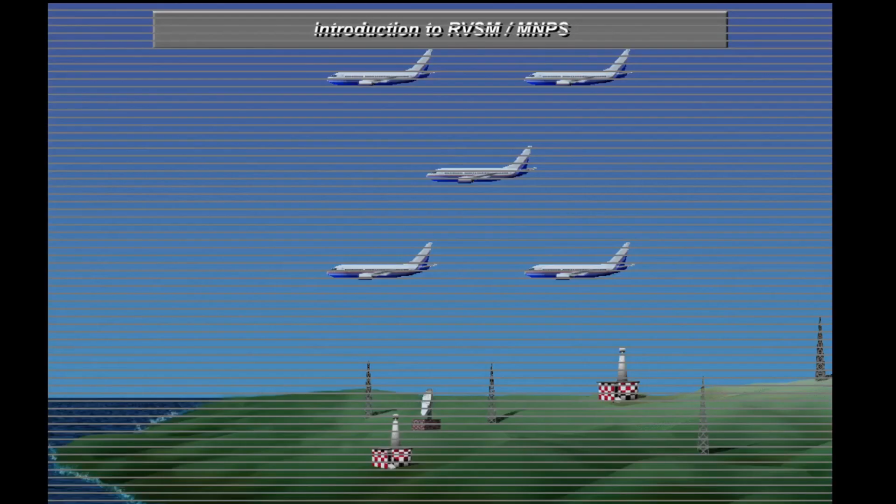Navigation aids on the ground enable aircraft to pinpoint their position with high accuracy.

Most oceanic airspace lacks radar coverage and radio navigation aids, so aircraft must rely on their own long-range navigation systems. To ensure safety, air traffic control requires higher separation standards in oceanic airspace. Improvements in technology and redundancy now allow approved aircraft to fly with reduced vertical and horizontal separation in certain airspace. MNPS airspace allows reduced lateral separation requirements, while RVSM airspace allows reduced vertical separation requirements.

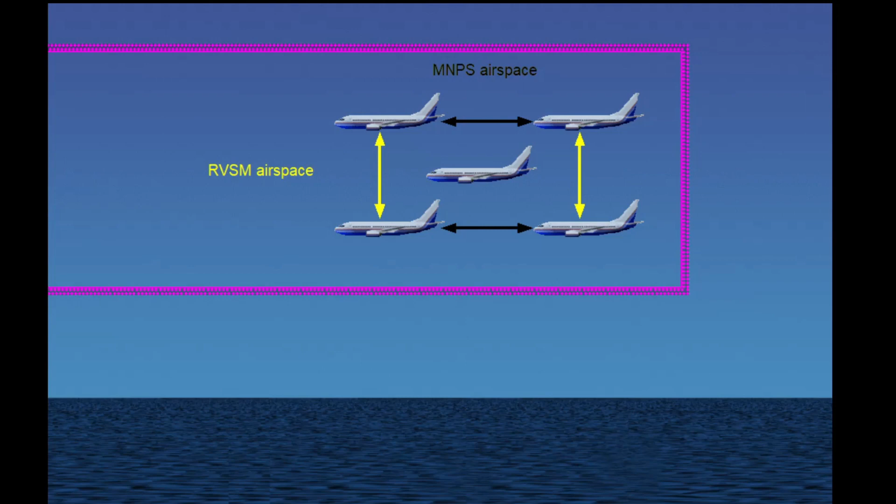Let's take a closer look at MNPS, which stands for Minimum Navigation Performance Specification. MNPS airspace has been implemented in the North Atlantic region within these oceanic control areas from flight level 285 to flight level 420.

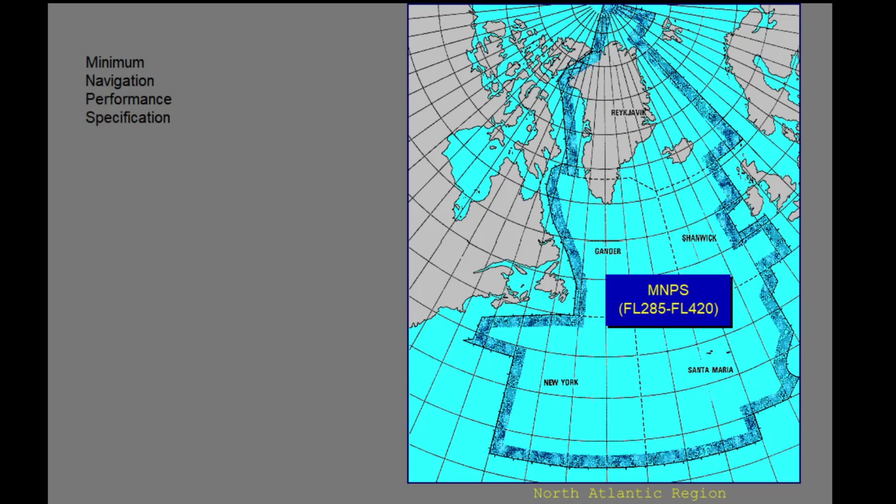Organized tracks in the North Atlantic were once spaced 120 nautical miles apart. With the implementation of MNPS, the track spacing has been reduced to 60 nautical miles. This saves fuel and minimizes traffic delays by accommodating greater numbers of aircraft in the most fuel-efficient routes available. Aircraft within this airspace must be able to fix their position with a higher degree of accuracy.

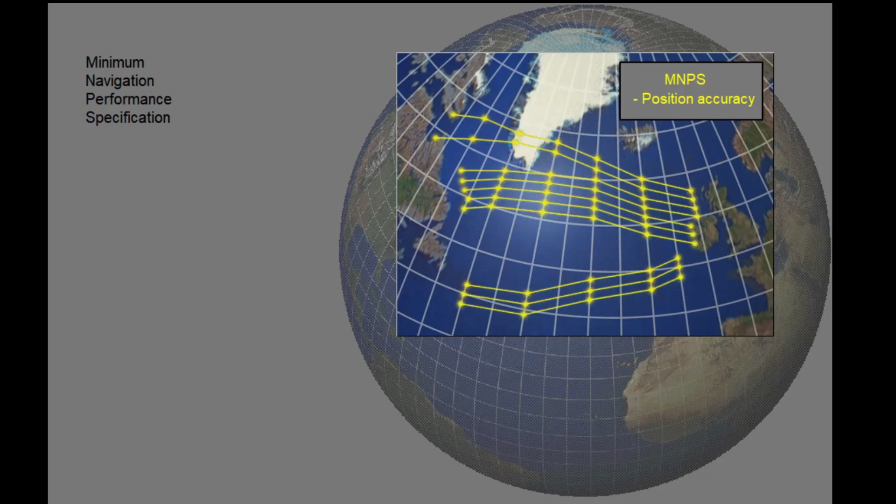The North Pacific region has fixed tracks spaced 50 nautical miles apart. Within the North Pacific route system, the primary form of lateral separation is based on RNP-10. RNP-10 airspace makes a requirement for accurate position keeping, but it is not considered MNPS airspace.

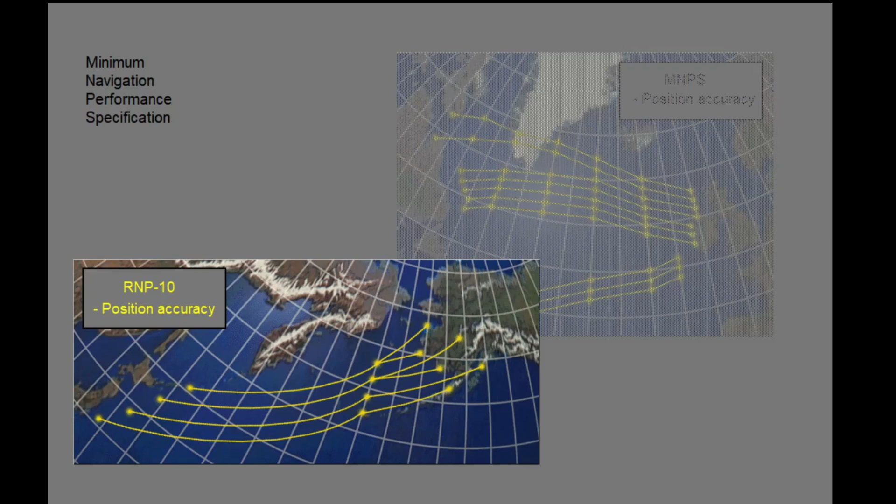MNPS airspace specifies both the position accuracy for the aircraft and sets additional requirements for the carriage of specific navigation equipment. We'll discuss these requirements later in the lesson.

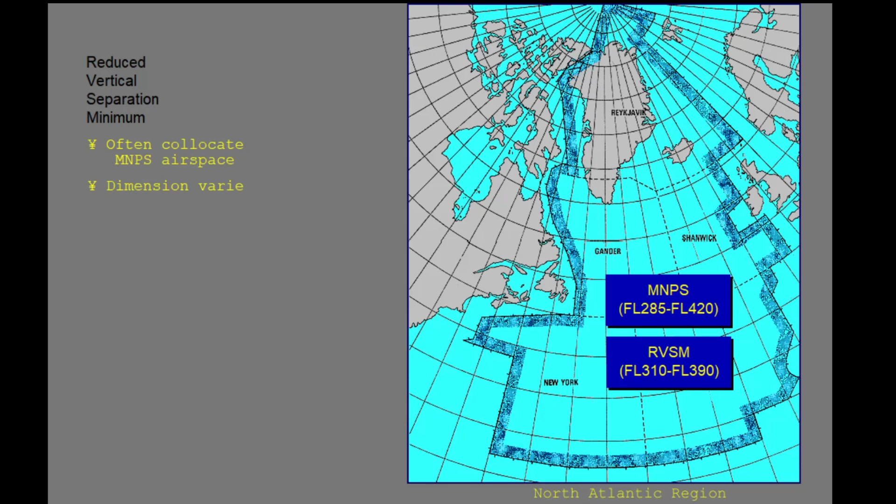Now, let's take a closer look at RVSM, or Reduced Vertical Separation Minimum. Generally, RVSM airspace in the North Atlantic is co-located with MNPS airspace. The dimensions of this airspace varies. In the North Atlantic, RVSM airspace is between flight level 310 and flight level 390. In the North Pacific, RVSM airspace is between flight level 290 and flight level 410.

RVSM transition areas indicate where ATC will transition aircraft from 2,000 feet separation to 1,000 feet separation. This transition occurs under radar contact in specified transition areas.

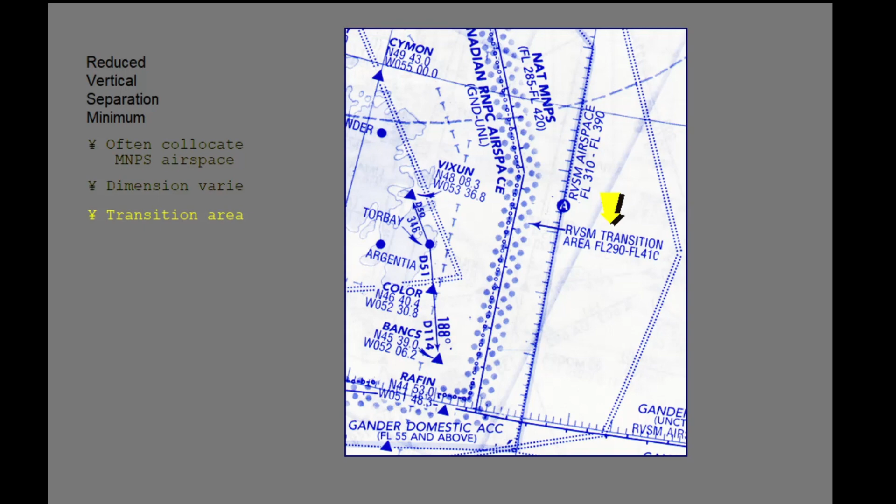In the United States, above flight level 290, the conventional vertical separation minimum is 2,000 feet. As of January 20, 2005, domestic RVSM was implemented. This allows for 1,000 feet of separation. RVSM saves fuel by allowing more aircraft at the most fuel-efficient altitudes.

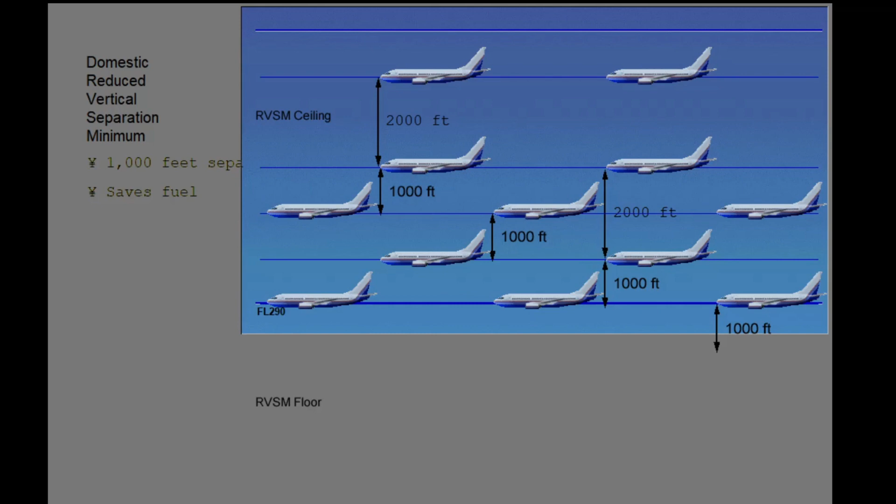With the reduced separation, there are now 6 new flight levels available for use. This allows for more direct routing, reduced traffic convergences, and less delays.

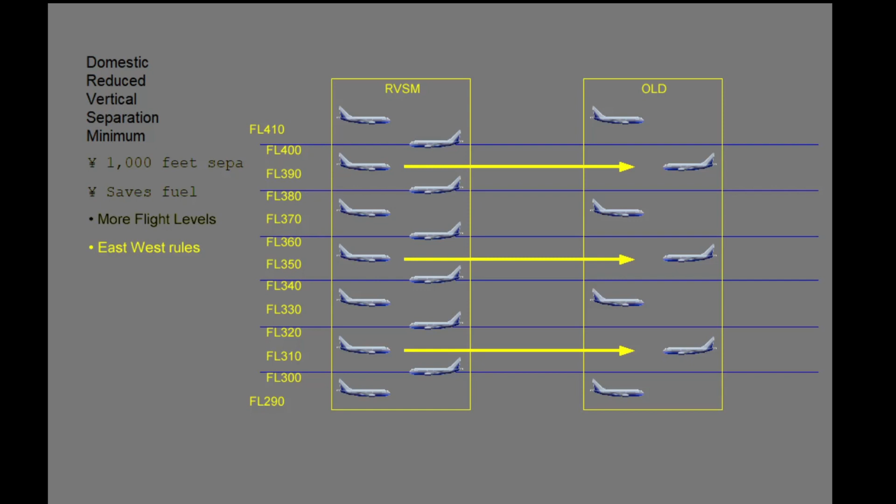Note that all of the flight levels in RVSM airspace obey the standard east-west rules for cruising altitudes. Flight levels 310, 350, and 390, which were once westbound under conventional separation, are now eastbound in RVSM airspace.

RVSM airspace is from flight level 290 to flight level 410. Above flight level 410, the 2,000 feet separation remains. Aircraft and operators that are not RVSM certified may not enter this airspace. Aircraft not certified must specify negative RVSM to the controller before requesting a clearance to climb or descend through this airspace.

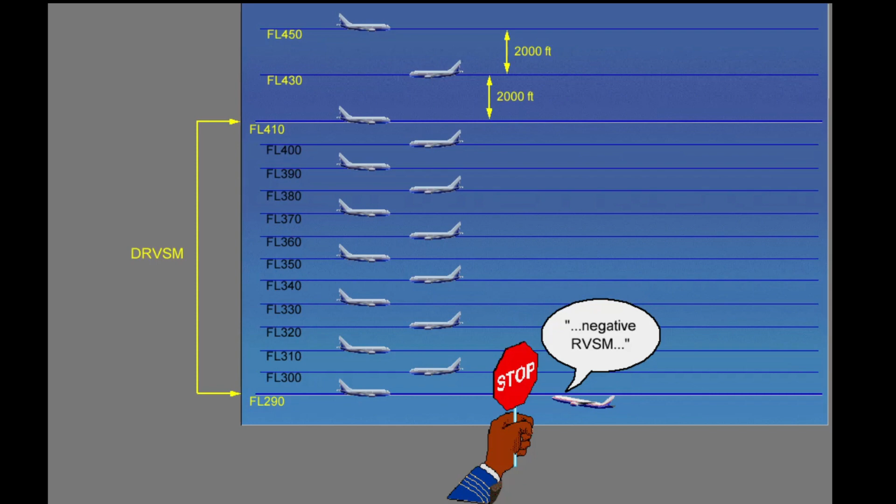When domestic RVSM in the lower 48 states was implemented, RVSM in adjoining airspace was also activated. This included Alaska, Canada, Gulf of Mexico, Atlantic high offshore airspace, the San Juan FIR, the Caribbean, and South American regions.

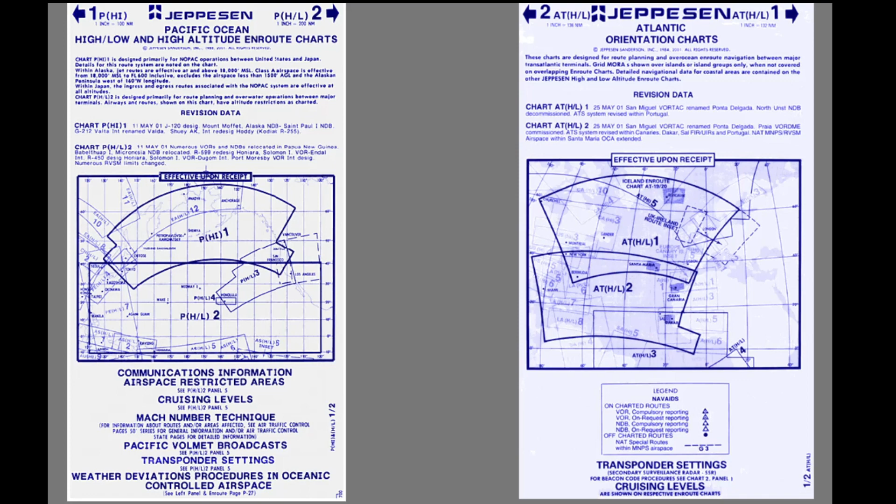The best single-source reference to operations in these airspaces is on the charts themselves. For example, the Jeppesen Pacific and Atlantic orientation charts contain most of the information presented in this lesson.

Safety is maintained by restricting RVSM airspace to approved operators with properly trained flight crews and to aircraft with specific equipment. These requirements are specified in 14 CFR Section 91.180 and Appendix G to Part 91. Additional requirements for aircraft and operator approvals are contained in Document 91 RVSM.

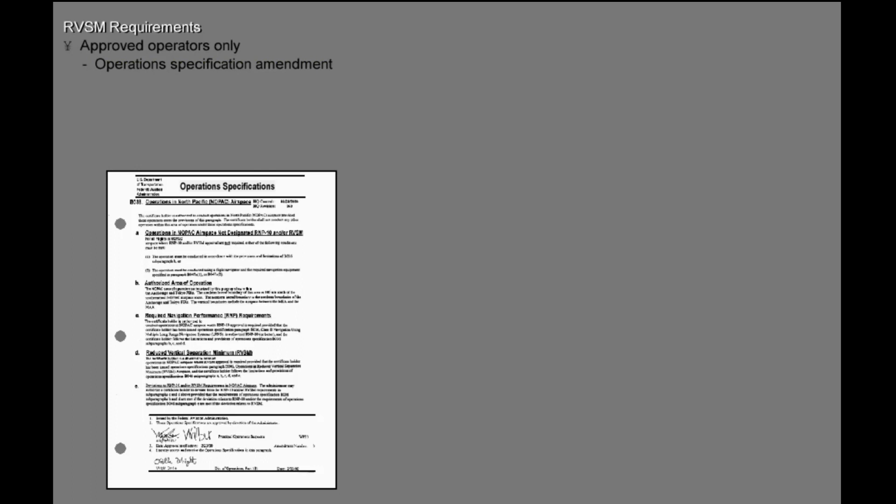Let's take a closer look at some of these requirements. An operator must have approval from their respective state of registry before conducting flight operations into this airspace. The operator should receive from their Civil Aviation Authority either an approved amendment to their operations specification, a letter of authorization for Part 91 operators, or a management specification for fractional ownership operations.

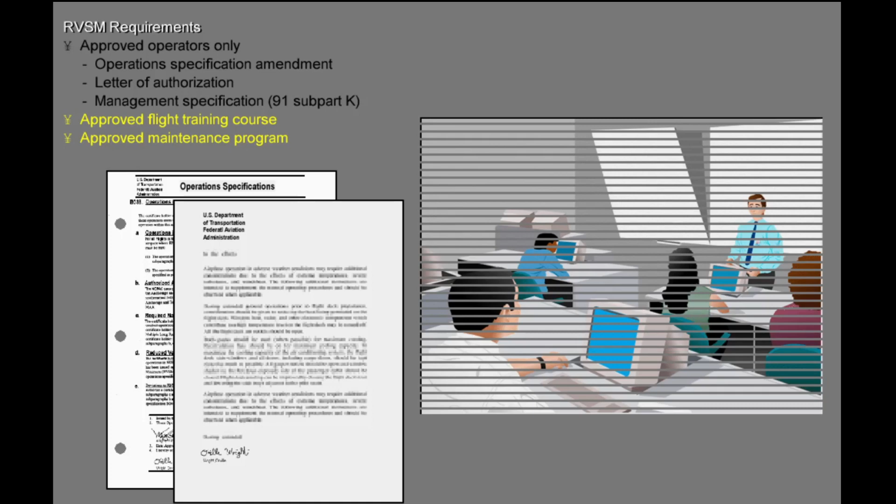The flight crew must accomplish an approved training course, and there must be an approved RVSM maintenance program also in effect.

For RVSM airspace, the aircraft must meet certain equipment requirements. There must be 2 independent primary altitude measurement systems.

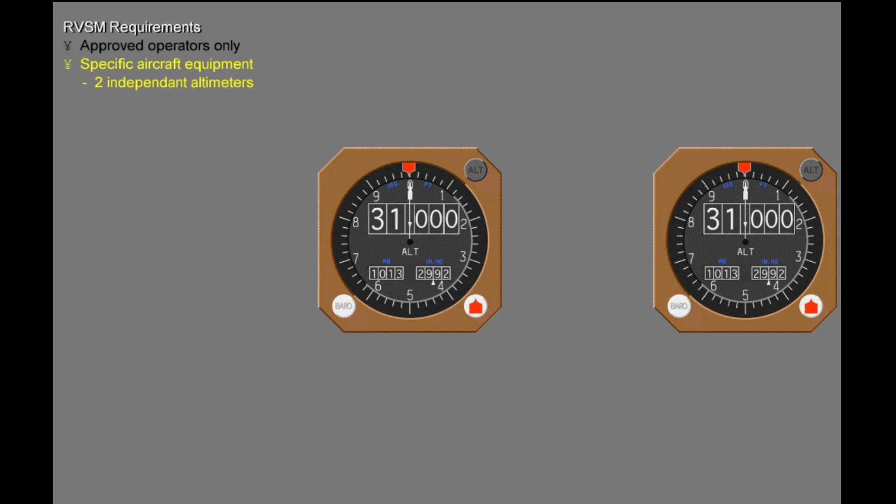The aircraft must be equipped with an altitude alerting system that signals an alert when there is a deviation from the selected altitude. The alert activates at plus or minus 300 feet for earlier type certificated aircraft, and at plus or minus 200 feet for later aircraft.

At least one automatic altitude control system must be installed. Also, at least one altitude reporting transponder is required. For MNPS airspace operations, the aircraft needs 2 long-range navigation systems, LRNSs.

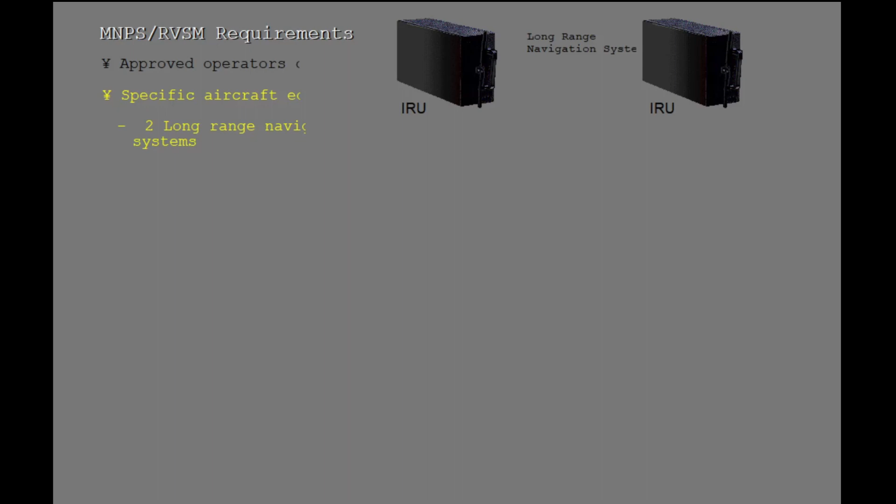A traffic collision avoidance system, or TCAS, is not listed as a specific requirement for RVSM airspace. However, with the exception of certain Part 91 operations, TCAS is now required equipment for most airplanes and operators. For RVSM operations, if the aircraft is equipped with TCAS, it must be TCAS 2 version 7 or later. Earlier versions are not compliant with RVSM.

Finally, ATC must be notified in flight if any of this equipment fails.

During flight planning, the flight crew and dispatchers should pay particular attention to conditions which may affect operation in RVSM airspace. Weather forecasts and observations should be examined for areas of turbulence and mountain wave activity. These can have an adverse effect on maintaining level flight.

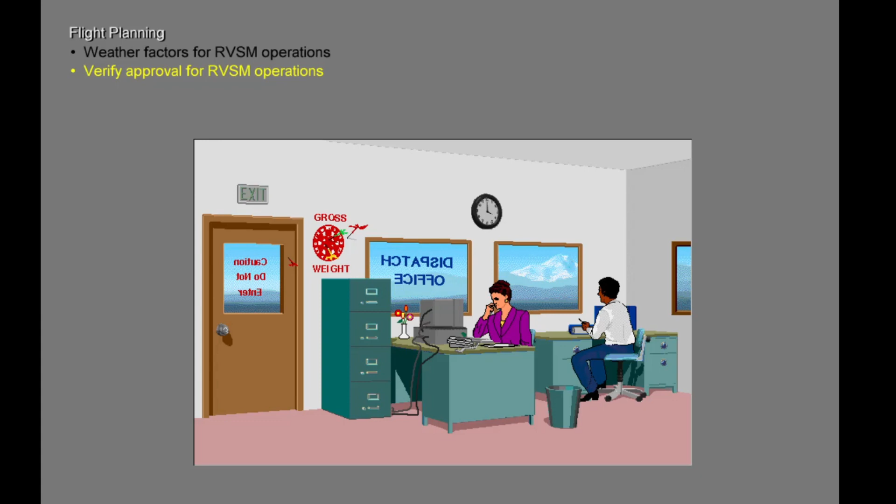Verify that the aircraft is approved for RVSM operations, and account for any restrictions or limitations that may be related to RVSM airworthiness. Annotate the flight plan as required.

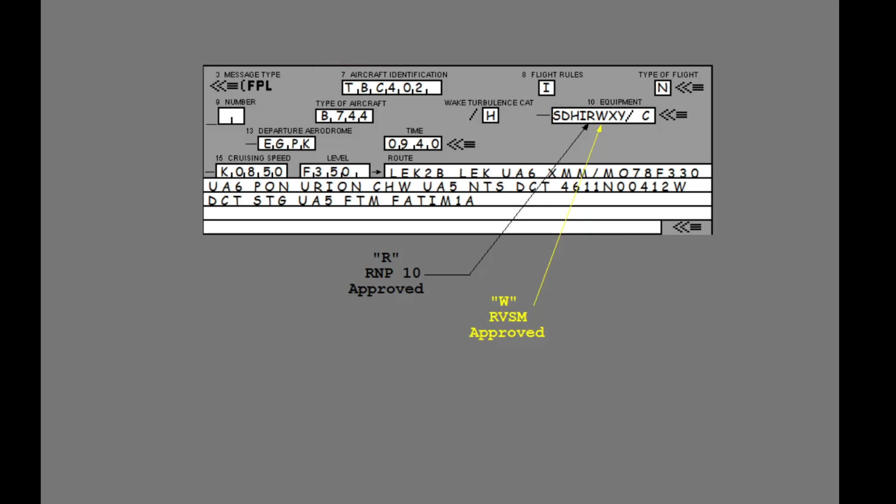The equipment box, or item 10, on the flight plan form should be annotated with the letter R to show RNP 10 approval. This is required, for example, when transiting the North Pacific MNPS airspace. The letter W shows RVSM approval, and the X shows MNPS airspace approval when transiting the North Atlantic. Other suffixes for regular equipment still need to be shown.

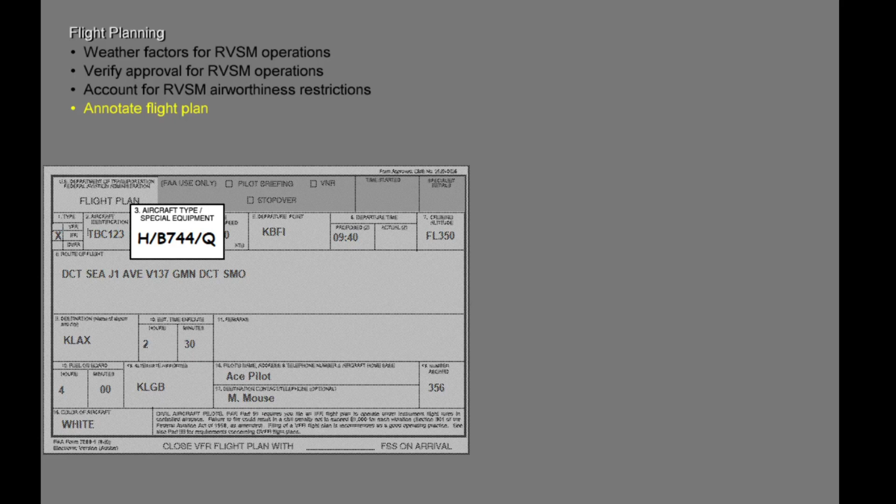Box 3 of the FAA flight plan form is used for equipment suffixes. Operators can only file one equipment suffix. This suffix is displayed directly to the controller.

As of September 1, 2005, aircraft equipment suffixes have changed to include additional codes for RVSM aircraft. Aircraft with advanced RNAV equipment, Mode C transponders, and RVSM approval now use codes J, K, L, or Q as appropriate. Aircraft with RNAV and RVSM capability but not advanced RNAV capability will file slant W.

During your pre-flight checks, special attention should be paid to maintenance logs regarding airplane equipment pertinent to RVSM MNPS flights. Checking the altimeter system is especially important for flights in RVSM airspace. As always, set the altimeters to the local QNH setting for the airport.

Compare the altitude indications with a known value, such as the airfield elevation. Each altimeter should be within specified tolerances. The two primary altimeters should also agree with each other. The maximum height difference should not exceed 75 feet. During pre-flight, make a record of the altimeter readings for use in possible contingency situations.

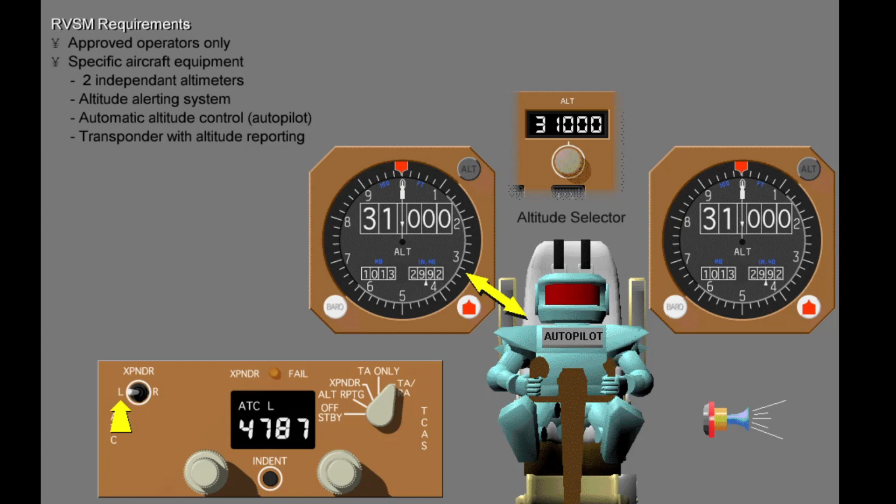When the left altimeter is used to control the altitude, either manually or with an autopilot, the left transponder should be selected. This ensures that transponder Mode C transmissions reflect the controlling altimeter. Similarly, if the right altimeter is used to control altitude, then the right transponder should be selected. Select the left transponder now.

For MNPS airspace operations, longitudinal separation depends on accurate position reports. Position reports are based on UTC time. Therefore, a time check of the aircraft master clock must be made as part of the pre-flight. The aircraft clock must be synchronized to an acceptable UTC time signal. An error of only 1 minute equals approximately an 8 nautical mile position error.

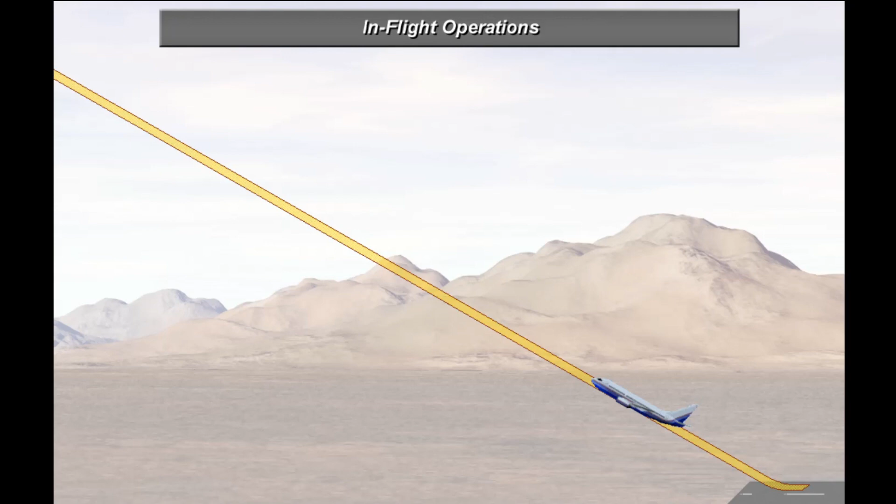During climb, special attention should be made passing the transition altitude to reset the altimeter to the standard setting of 1013 millibars or 29.92 inches. Reset the altimeter.

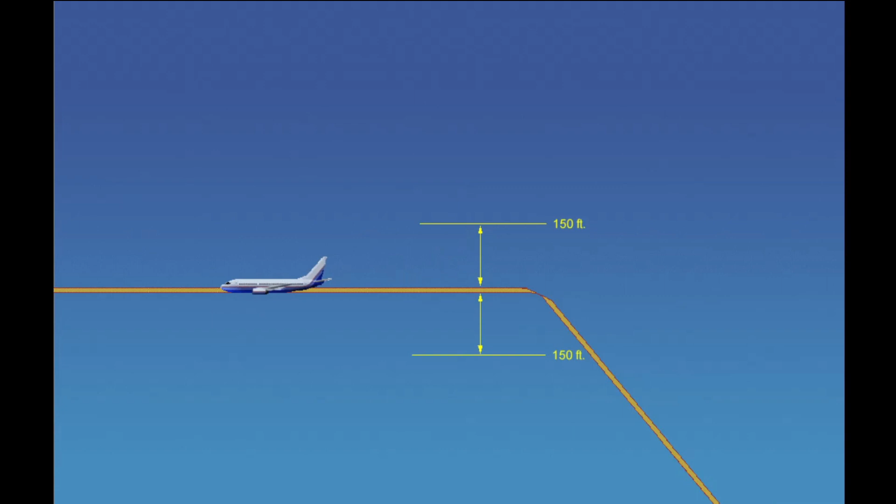When cruise altitude is captured, or when you are cleared to a new flight level within RVSM airspace, the airplane should not be allowed to overshoot or undershoot by more than 150 feet. An automatic level-off is recommended.

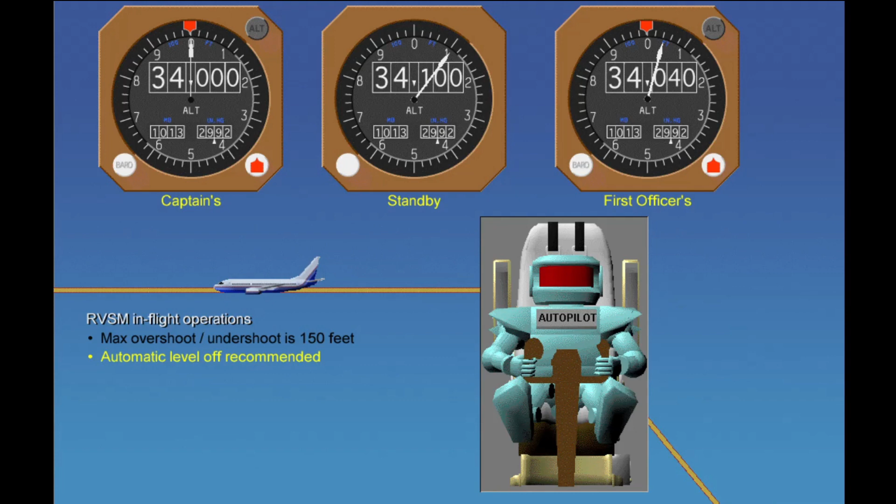Pilots should verify that the cruise altitude matches the ATC clearance received. A recheck of the standard altimeter setting is recommended when reaching the initial cleared flight level.

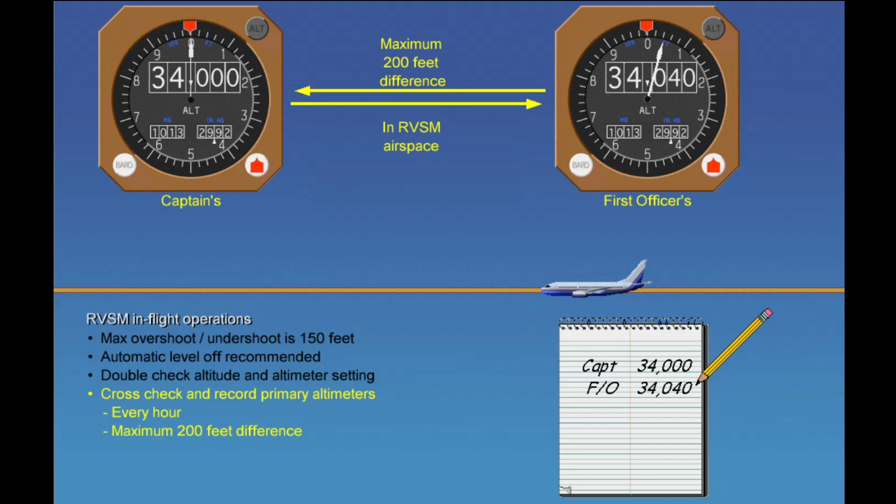After your initial level-off and while in RVSM airspace, cross-check and record the primary altimeters approximately every hour. They should agree within 200 feet. A lesser value may be specified in the aircraft operating manual.

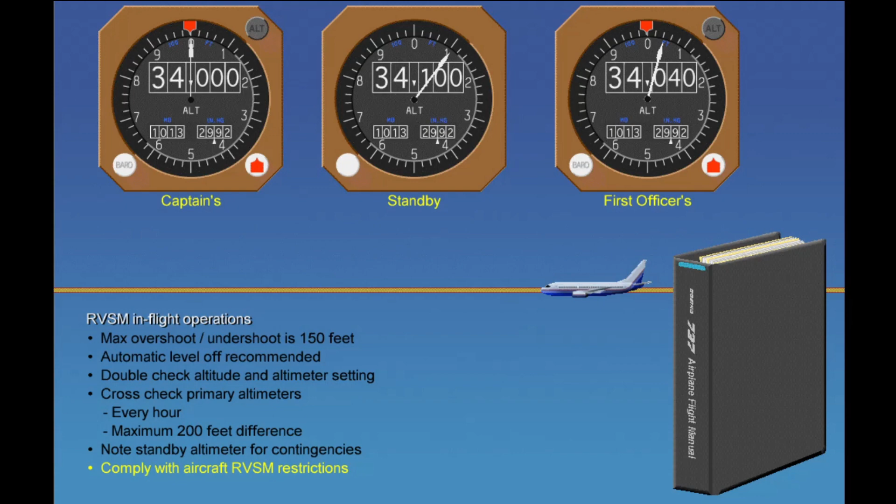Depending on your aircraft, the standby altimeter may not be certified for RVSM. However, the difference between the primary and standby altimeters should be noted for use in contingency situations. Be sure that you are complying with any aircraft operating restrictions, such as a maximum Mach number for RVSM airspace.

Accurate speeds and accurate position reports provide the basis for longitudinal separation between successive aircraft. Maintain your assigned Mach number at all times, including en route climbs and descents, unless a specific reclearance is obtained. Continue to fly your assigned speed after leaving oceanic airspace unless ATC authorizes a change.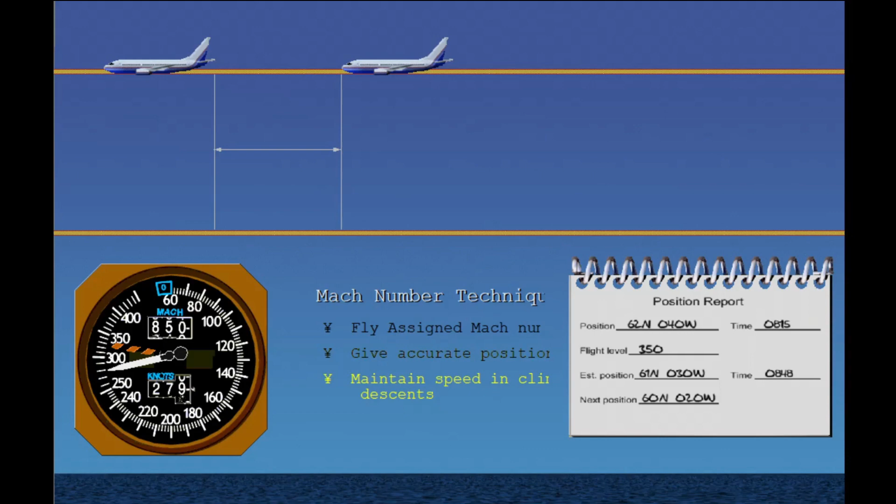For North Atlantic airspace, retain your last assigned code for 30 minutes after entering NAT airspace, then squawk 2000. Reset the transponder.

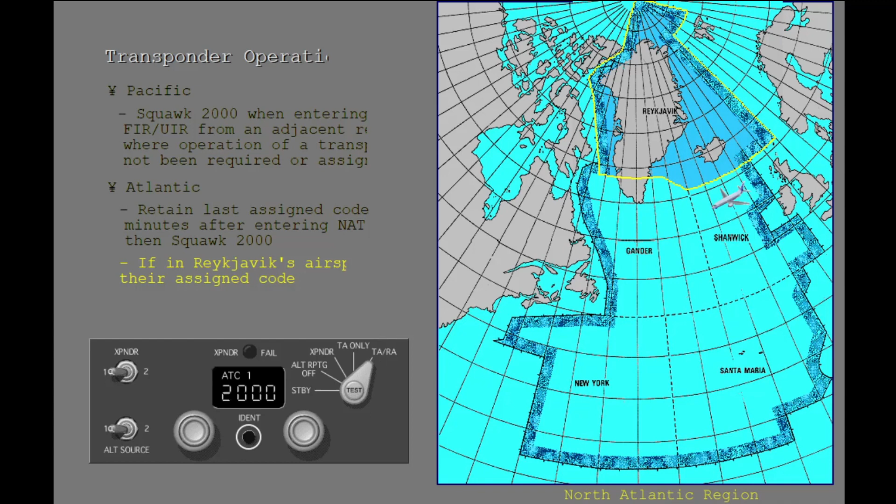If operating in Reykjavik's airspace, they may assign you a discrete code. If assigned, use it throughout the Reykjavik OCA.

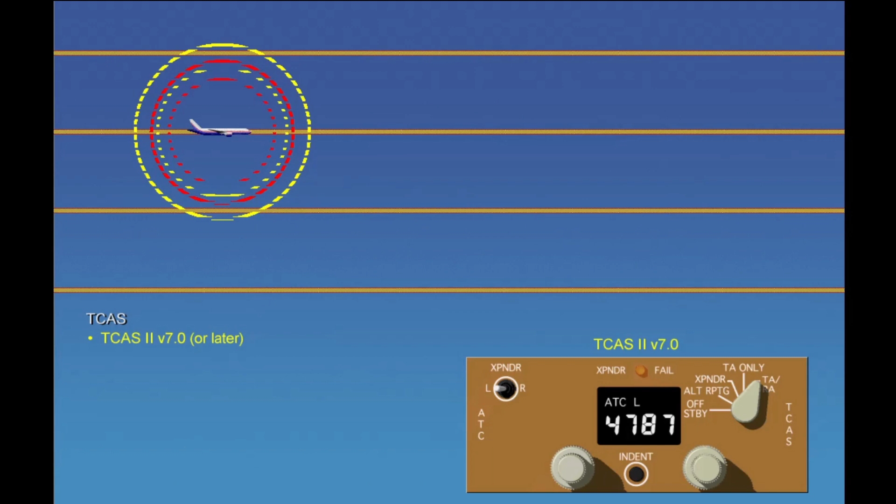Now, let's do a quick review of the TCAS system. Recall that for RVSM airspace, if TCAS is installed, it must be TCAS 2 version 7 or later. The alerting criteria has been adjusted to accommodate the reduced vertical separation. However, nuisance alerts are still possible, but can be reduced with proper procedures.

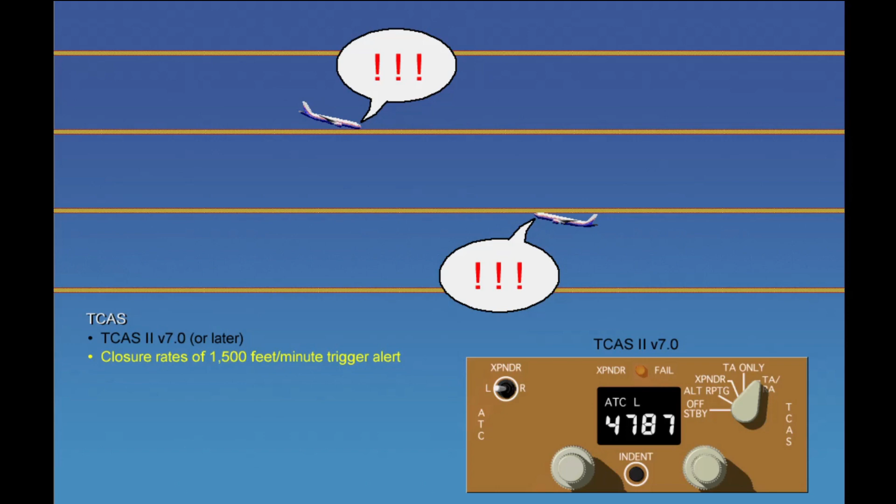If two aircraft are approaching adjacent flight levels in the same proximity, an alert will be triggered if the closure rate between the two is 1,500 feet per minute or greater. For this reason, pilots should restrict their rate of climb or descent to 1,000 feet per minute or less when operating within 5 nautical miles and 2,000 feet of other aircraft to minimize the generation of TAs and RAs.

During flight, the transponder mode selector should remain in the TA-RA mode. For level flight, traffic alerts are triggered at 850 feet. Resolution advisories are triggered at 700 feet. Finally, recall that all RAs must be reported to ATC.

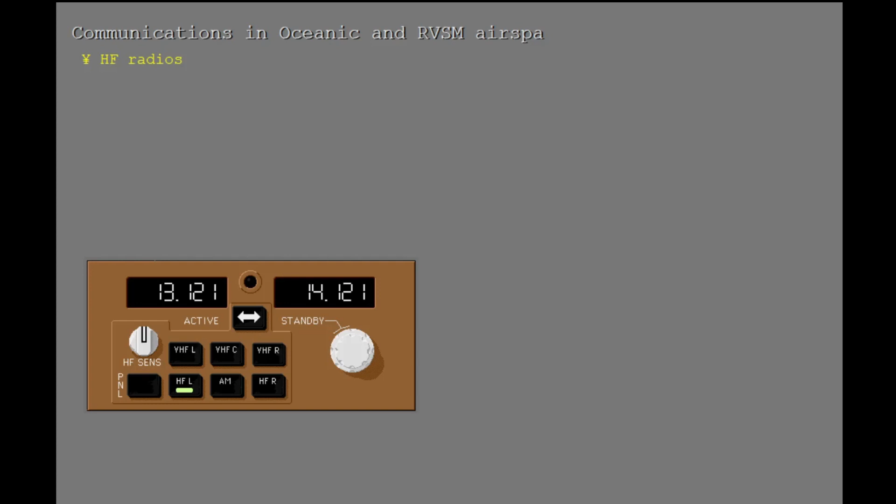Most oceanic airspace requires the use of high-frequency HF radios. Selective calling, or SELCAL, is also used, and an operational check should be performed when checking with each new controller.

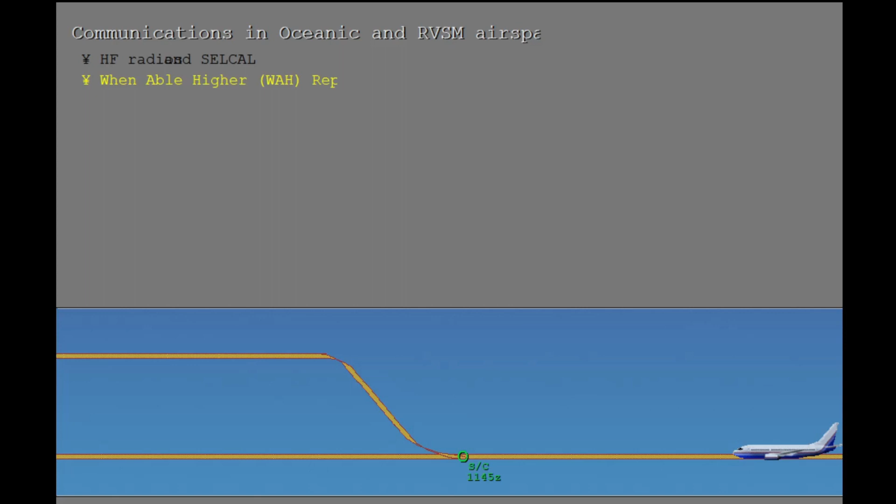When able higher reports are used to facilitate en route climbs. They may be required or optional depending on the Oceanic Control Area, OCA. Pilots should indicate the highest flight level they can accept and the time or position at which this can be achieved.

When able higher reports should be made on initial contact with ATC at each OCA boundary. The report can also be added to the end of routine position reports.

There are two things to remember regarding the When Able Higher, or WAH, report. First, a WAH is not interpreted as a request for a higher altitude. Second, an ATC acknowledgement of a WAH is not a clearance to change your altitude. A separate clearance request must be made.

Communications regarding altitude changes in RVSM airspace is very important. Pilots should report when leaving an altitude, and when reaching level flight after making a climb or descent. The only exception is when under automatic dependent surveillance or radar contact.

In oceanic airspace, meteorological reports, or MET reports, of wind and temperature in flight should be passed to ATC when required. On published airways, such as the North Pacific, the M symbol designates a required MET reporting point.

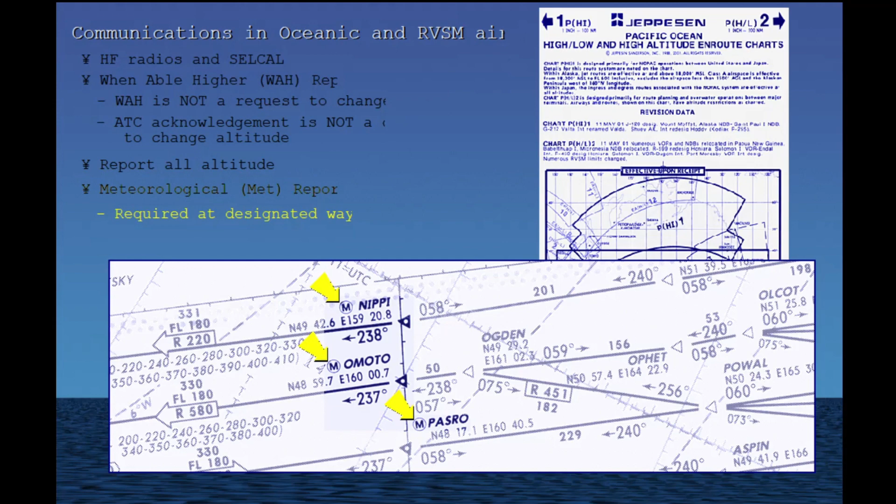In the North Atlantic airspace, when operating along an organized track, MET reports are only required if your flight is designated to give them as part of your oceanic clearance. MET reports are required on all flights that are not entirely along an organized track.

If required, MET observations should be recorded crossing each longitudinal reporting point and midpoint. MET reports are given by appending them to the end of position reports. The format for these is shown on the appropriate chart.

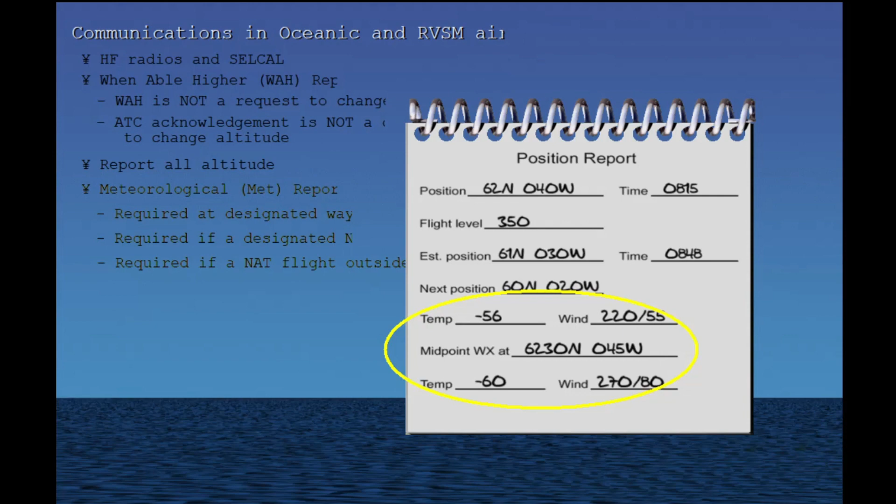Now let's examine the standard phraseology used by pilots and controllers in domestic RVSM airspace. ATC may inquire if you and your aircraft are approved for RVSM operations. The phraseology used by ATC is confirm RVSM approved.

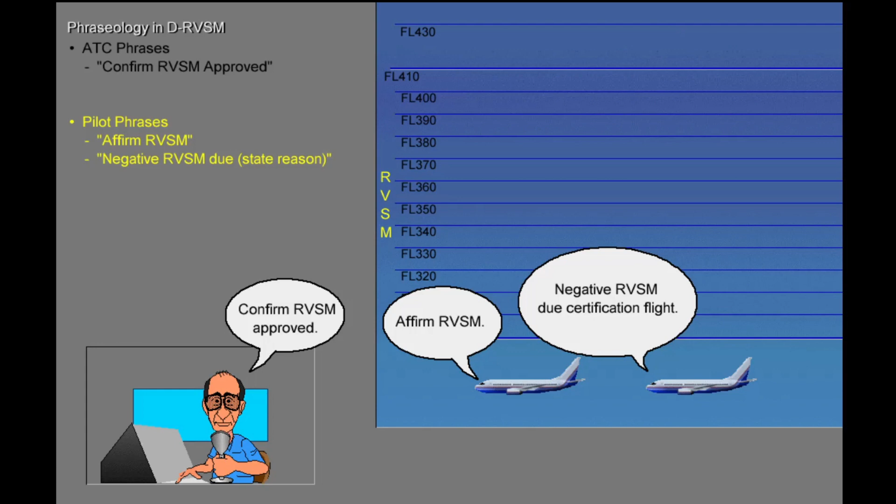The proper response is either affirm RVSM or negative RVSM. If not RVSM approved, be sure to include the reason, such as negative RVSM, due certification flight. If ATC denies your clearance, they will state unable to issue clearance into RVSM airspace.

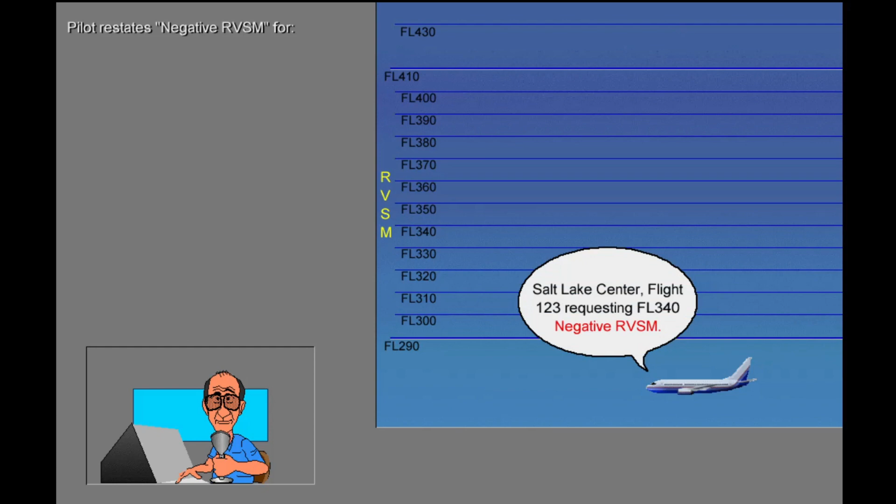If ATC allows an unapproved aircraft to fly in or through RVSM airspace, the pilot should report negative RVSM for the following situations: in all requests for flight level changes pertaining to flight levels within the RVSM airspace.

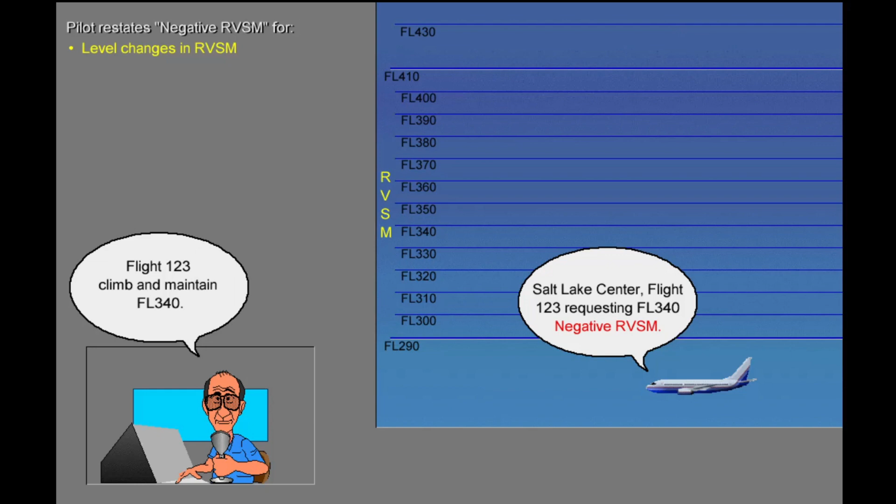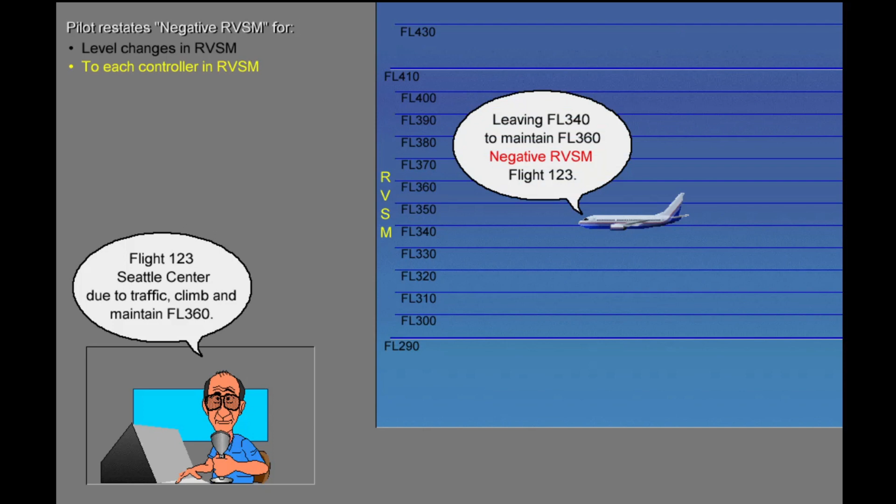On the initial call on any frequency in the RVSM airspace, in all readbacks to flight level clearances pertaining to flight levels within the RVSM airspace, and in readbacks of flight level clearances involving climb or descent through RVSM airspace.

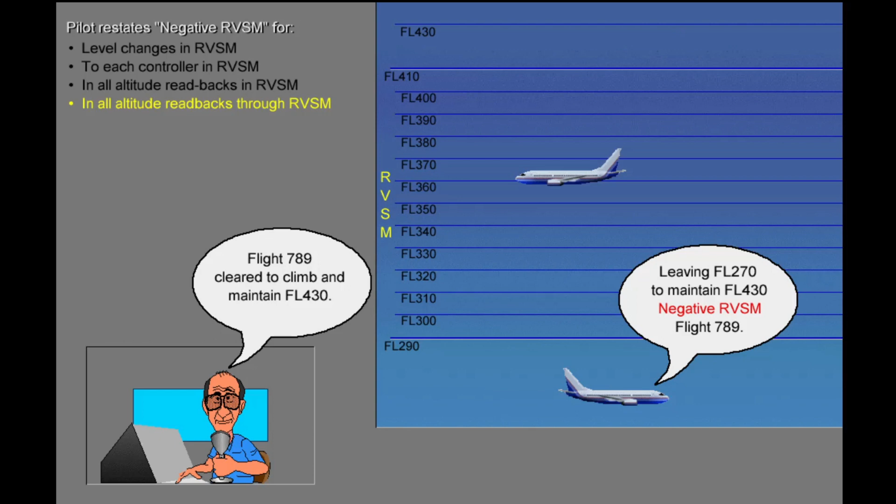If any of your required equipment for RVSM flight fails, such as all primary altimeters, automatic altitude control systems, altitude alerters, or transponder, you must state to ATC unable RVSM due equipment. Be sure to repeat this restriction on initial contact to each controller while in RVSM airspace.

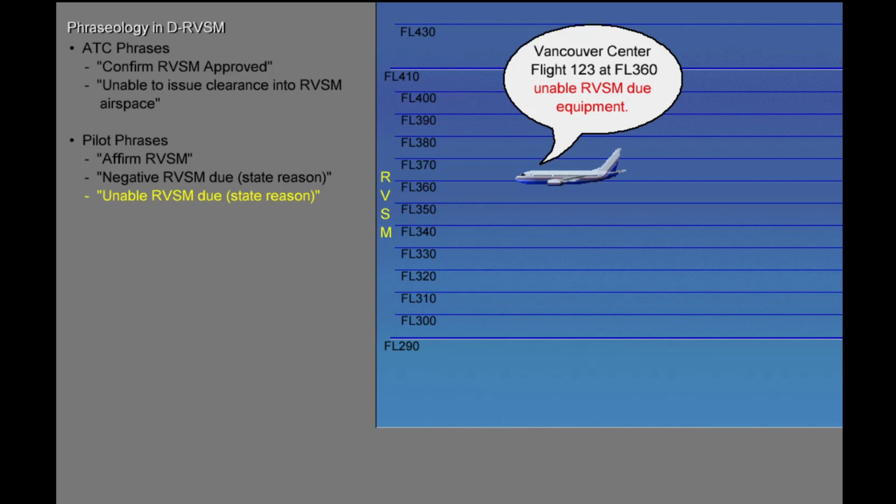If you are unable RVSM due to weather, be sure to state the reason, such as turbulence or mountain wave. When clear of the weather or if failed equipment has been resolved, inform ATC. The proper phraseology is confirm able to resume RVSM and ready to resume RVSM.

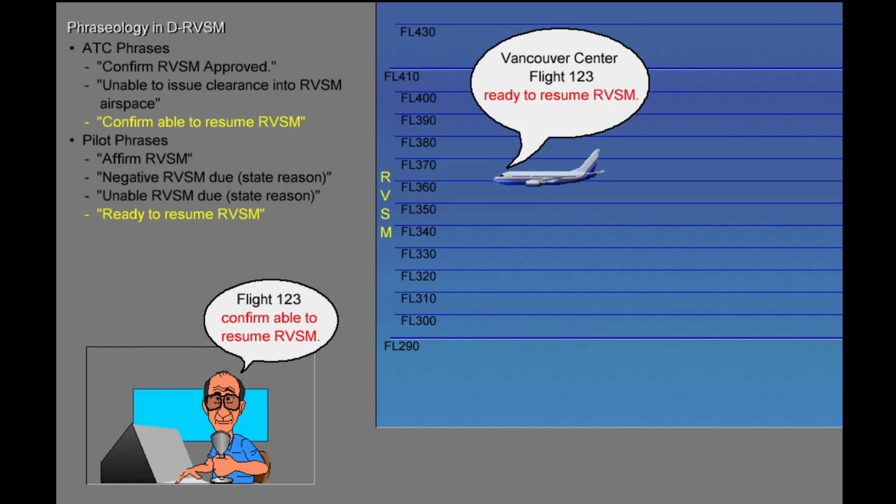Sometimes things don't always go as planned. Equipment failures and weather may cause you to deviate from your original flight plan. Special procedures for these contingencies have been set up for operations in MNPS and RVSM airspace. Procedures for in-flight contingencies differ depending on the airspace. For RVSM airspace and oceanic areas and MNPS airspace, refer to appropriate reference material.

Procedures for the loss of radio communication can vary. Lost comm procedures may be different depending on whether you've entered the oceanic airspace and whether you've received an oceanic clearance yet.

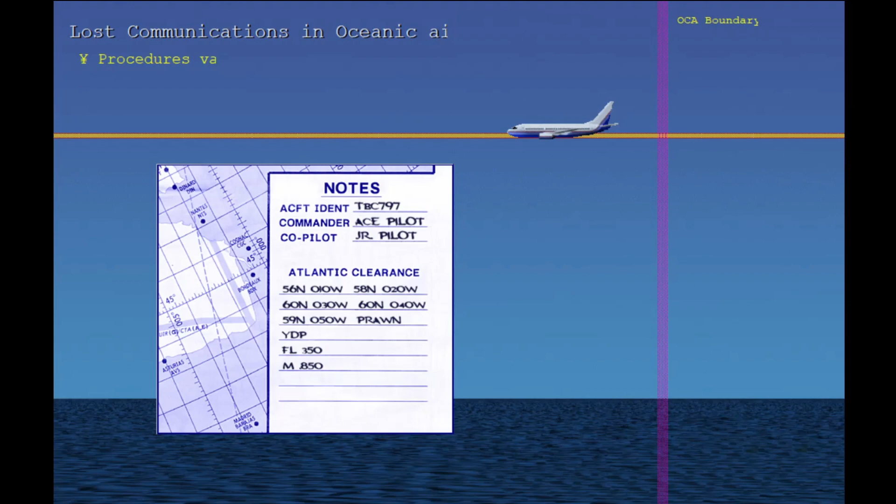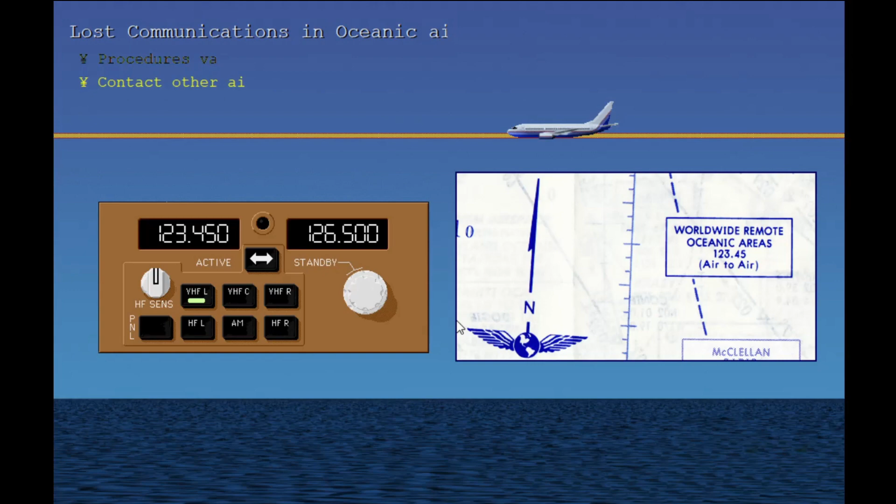In general, here are some things to remember. If unable to reach ATC, attempt to contact other aircraft to relay a message. Tune left VHF radio to the air-to-air frequency. Use the emergency frequency 121.5 if necessary. If all communication is lost, set the transponder to 7600.

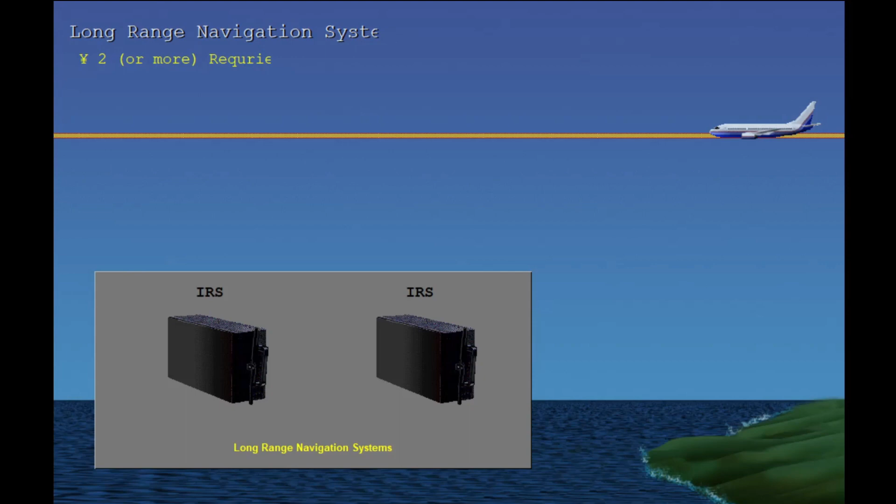Remember, at least 2 long-range navigation systems are required. However, special routes have been established if failures leave you with only one system operational. If both systems fail, entry to MNPS airspace is not allowed.

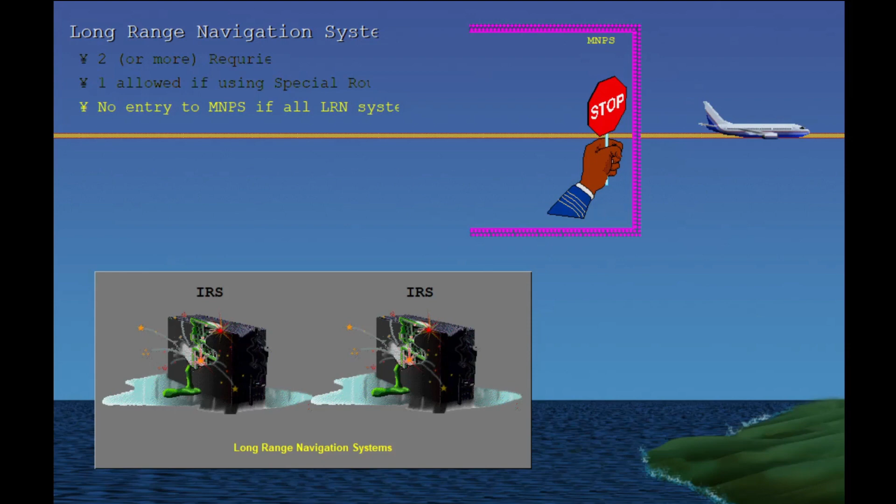If total failure occurs while in MNPS airspace, then pilots should use their best judgment. Immediately notify ATC. Keep a vigilant lookout for other aircraft. Resources available to you include radio navigation aids, visual sightings, weather radar ground returns, and other aircraft for useful information.

Three types of contingencies for domestic RVSM airspace are discussed next: equipment failures, weather-induced severe turbulence and/or mountain wave activity, and wake turbulence from other aircraft.

Recall that in RVSM airspace, the maximum height difference between at least two primary altimeters should not exceed plus or minus 200 feet.

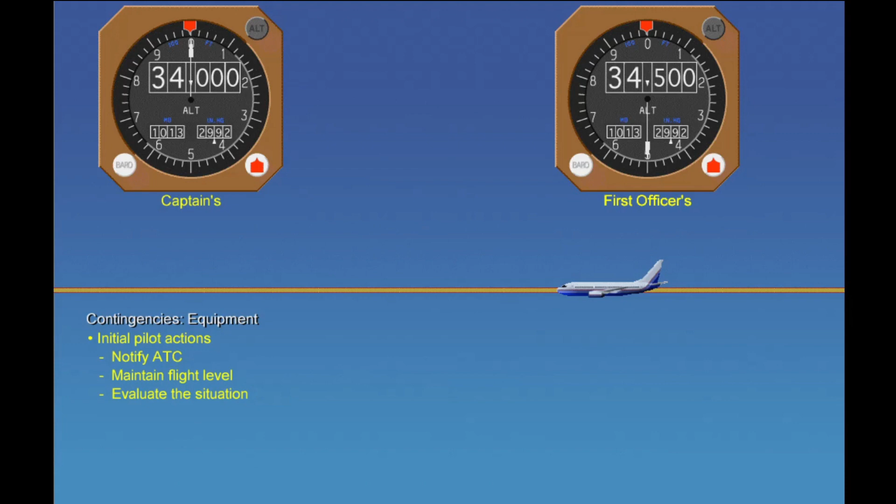If equipment required for RVSM flight fails, follow these initial reactions. Notify ATC and maintain your cleared flight level to the extent possible while evaluating the situation. Watch for conflicting traffic both visually and by reference to TCAS if equipped. Alert nearby aircraft by illuminating exterior lights, commensurate with aircraft limitations.

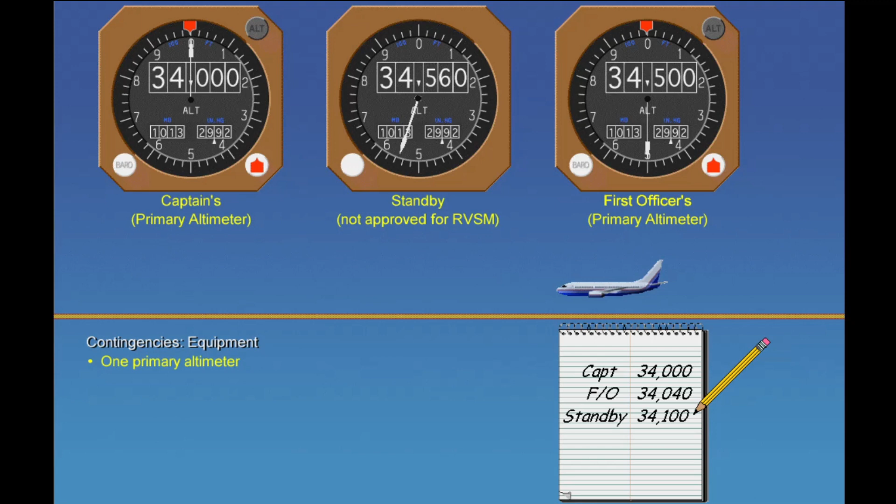For this situation, cross-check your standby altimeter to see if you can confirm at least one accurately operating primary altimeter. For this example, it appears that the captain's altimeter is the least accurate. Use the first officer's altimeter for aircraft control.

Notify ATC that you are operating with a single primary altimeter. Don't forget to change your Mode C reference.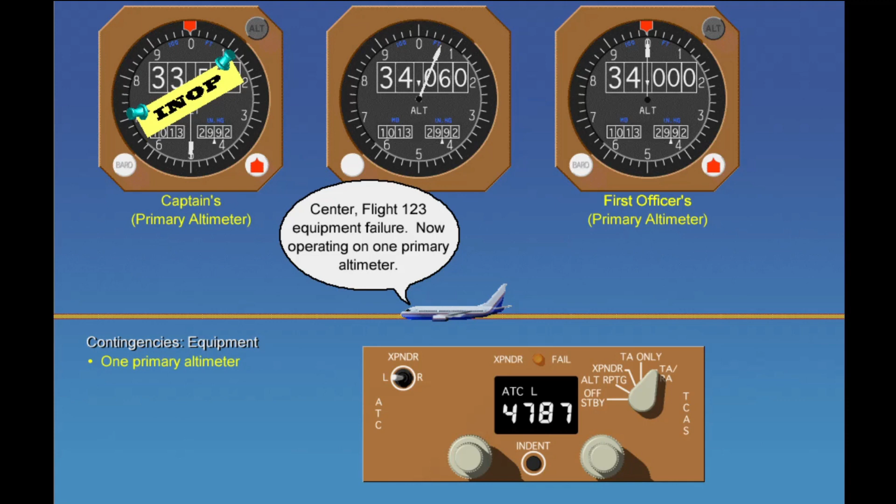ATC will acknowledge your situation.

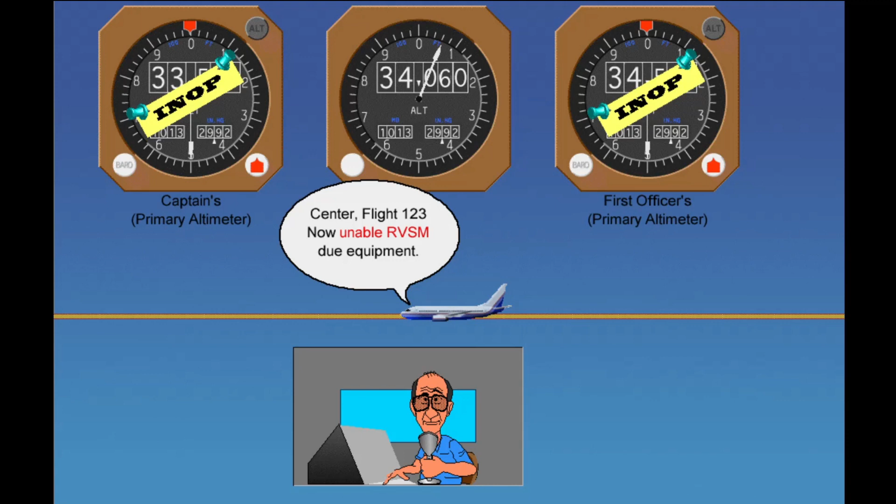If both primary altimeters fail, notify ATC that you are unable RVSM due to equipment. Unless operational situations dictate otherwise, you must vacate RVSM airspace. The controller will provide you with 2,000 feet vertical separation or appropriate horizontal separation until you are clear of RVSM. Remember, failure of your automatic altitude control system, altitude alerter, or transponder also constitutes an unable RVSM situation.

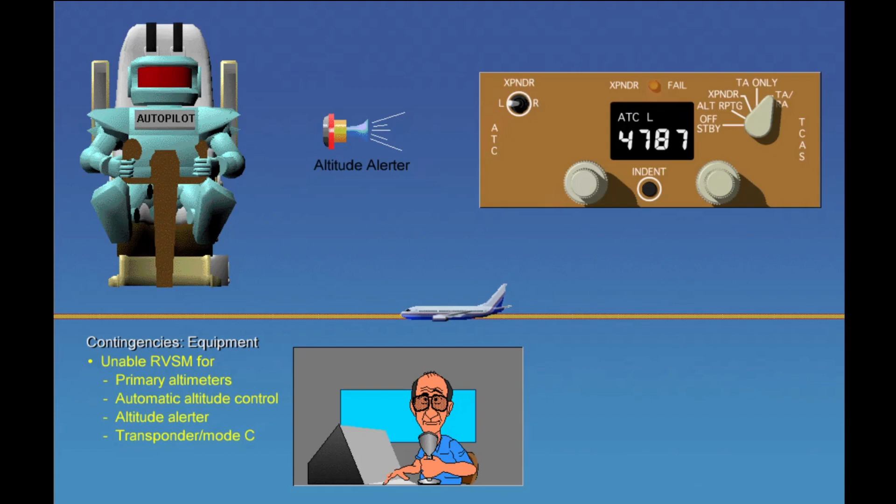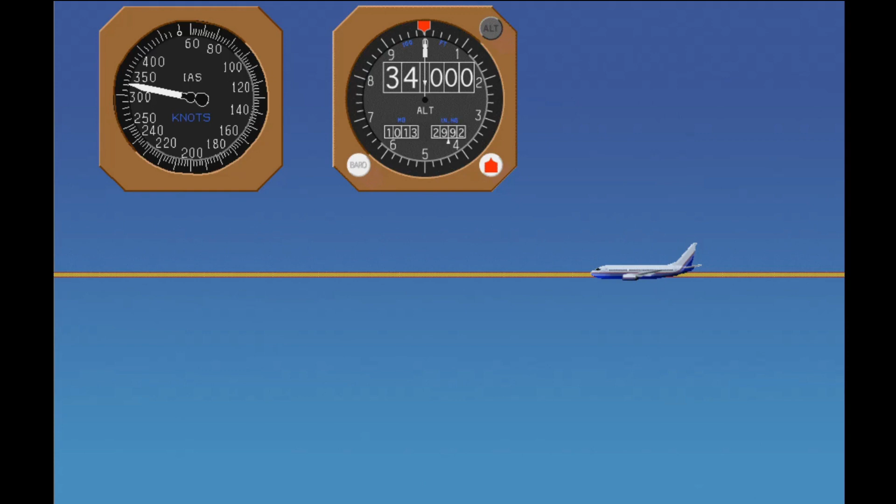Next, we'll look at contingencies based on weather, such as severe turbulence or mountain wave activity. Mountain wave activity refers to the cascading flow of air formed above and downwind of mountain ranges. The strong vertical component of this moving air can compromise the aircraft's ability to maintain altitude in RVSM airspace. Indications of mountain wave activity include altitude excursions and airspeed fluctuations with or without associated turbulence. Mountain waves can also cause pitch and trim changes to maintain altitude with accompanying airspeed fluctuations.

If you encounter small altitude deviations associated with the weather, notify ATC of the location and magnitude and consider a change in your flight level or routing. ATC will advise you of traffic and issue PIREPs to other aircraft.

However, if you encounter significant altitude deviations of approximately 200 feet or greater, notify ATC and state that you are unable RVSM due to turbulence or due to mountain wave as appropriate. The controller will advise you of conflicting traffic and provide vectors to aircraft to avoid merging targets. As before, consider a change in your flight level or a new route to avoid the area of mountain waves or turbulence.

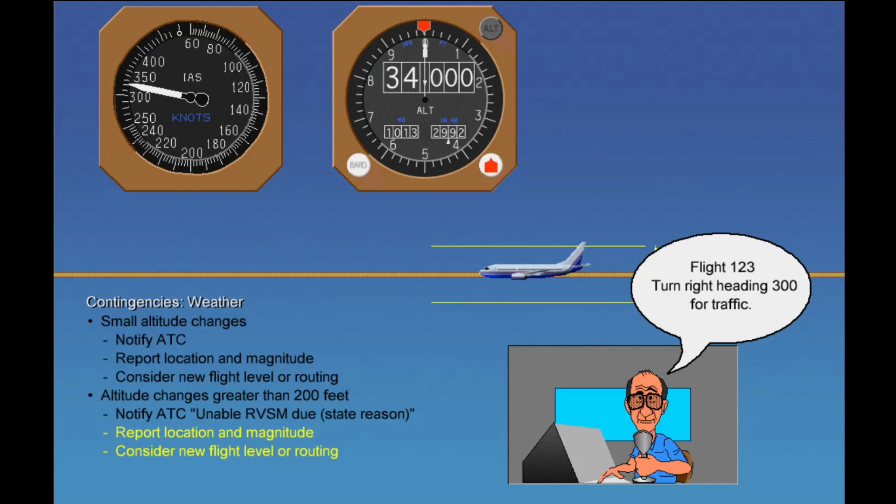Because of the reduced separation, wake turbulence avoidance may be necessary. Wake turbulence can occur in the vicinity of aircraft climbing or descending through your altitude. Be aware that aircraft 1,000 feet above you can produce a trail of wake turbulence from 10 to 30 miles behind it.

If you encounter or anticipate wake turbulence in RVSM airspace, you can request a vector, an altitude change, or, if properly equipped, a lateral offset. In domestic U.S. airspace, pilots must request a clearance to fly a lateral offset. Strategic lateral offsets flown in oceanic airspace do not apply. Note that offsets of approximately one wingspan upwind can be sufficient to move the aircraft out of the preceding aircraft's wake turbulence vortex.

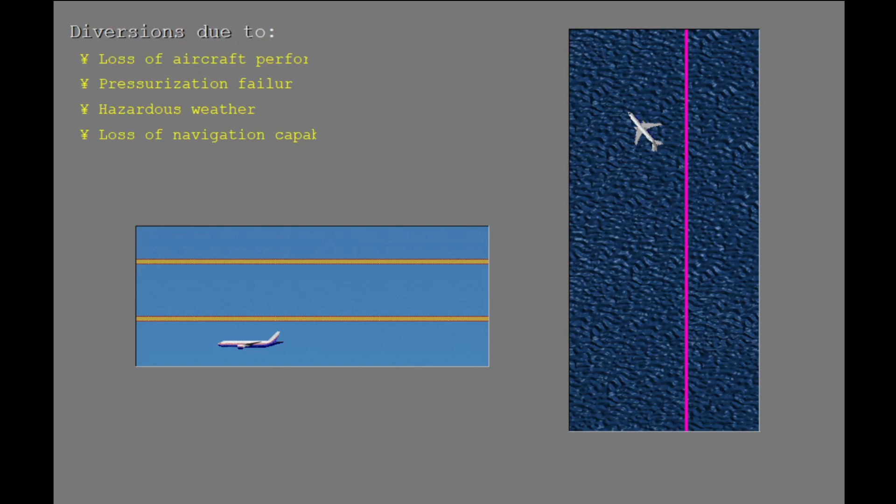Time constraints during an emergency could force you to deviate from your route without a clearance. Diversion contingencies have been established for loss of aircraft performance, pressurization failure, hazardous weather, or loss of navigation capability. In this topic, we'll cover some useful guidelines for making the necessary route and altitude deviations.

Whenever possible, try to obtain an ATC clearance prior to deviating from your route or altitude. If prior clearance cannot be obtained, then broadcast your position and intentions to other aircraft. Turn on all exterior lights and watch for traffic.

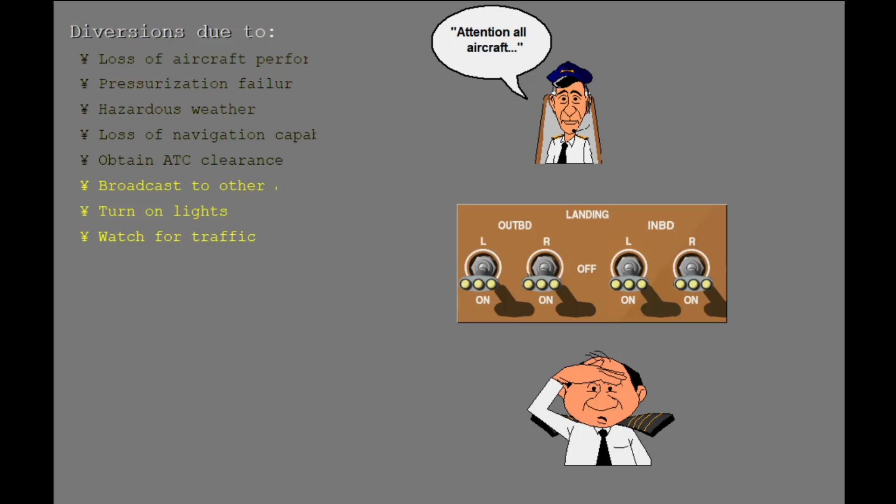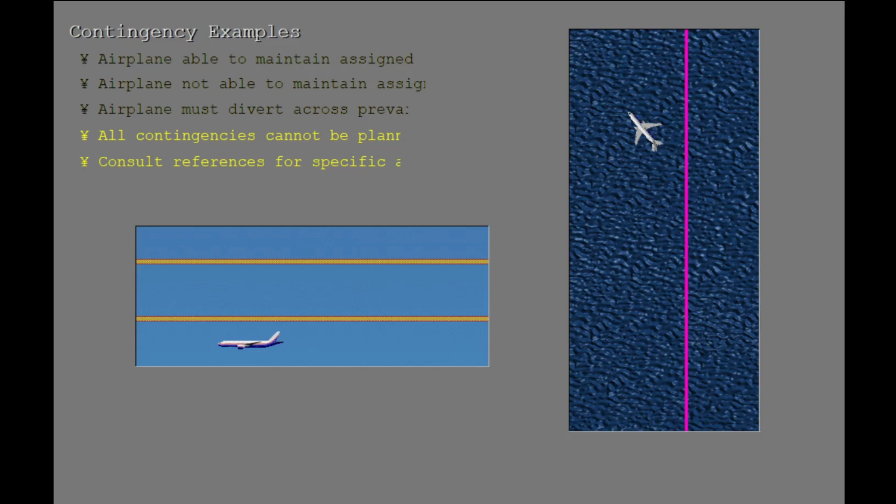Next, we'll discuss three contingency examples. These are based on whether or not the airplane is able to maintain its cleared flight level and if you need to divert across the flow of traffic. Remember, all possible contingencies cannot be planned for, so these procedures are for guidance only. Consult the references for your airspace for possible differences.

In this first example, let's examine a contingency where the airplane is able to maintain its assigned flight level. This diversion might be due to hazardous weather or loss of navigational or separation performance. The initial action, when unable to receive or accept an ATC clearance, is to leave the assigned airway or track by turning 90 degrees to the left or right whenever possible.

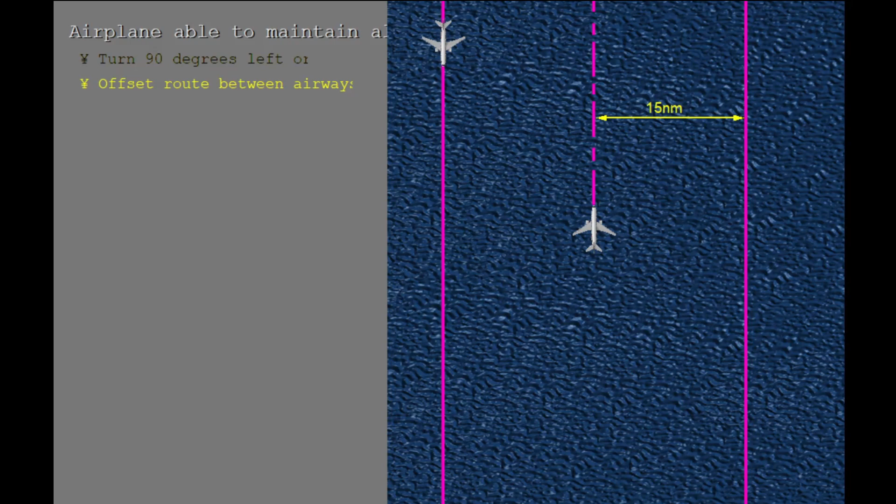Subsequent action should be to acquire and maintain a laterally offset track to your original route. A lateral offset of 15 nautical miles in NAT airspace will place you away from normal traffic areas. If you're flying a published airway in the Pacific, a 25 nautical mile offset will place you between adjacent airways.

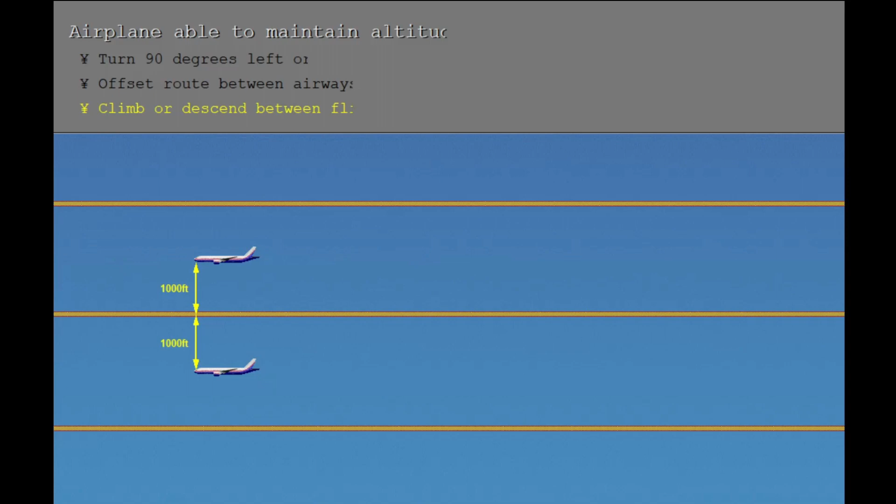The next subsequent action is to climb or descend to an altitude that is offset from normal traffic use. If within RVSM airspace, your altitude change would be 500 feet. If outside RVSM airspace, climb or descend 1,000 feet. The exception to this is if you are flying at the boundary altitudes for RVSM airspace. For example, if deviating from flight level 410, a 1,000-foot climb or 500-foot descent would be appropriate. Likewise, the reverse is true if deviating from the lowest RVSM altitude.

The next example is when the airplane is unable to maintain its assigned flight level. This diversion might be due to loss of aircraft performance or pressurization failure. Your initial action should be to minimize the descent rate to avoid possible traffic below you. Next, make a 90-degree turn while descending. Plan to intercept an offset from your original course as described earlier. When conditions allow, maintain an appropriate offset altitude.

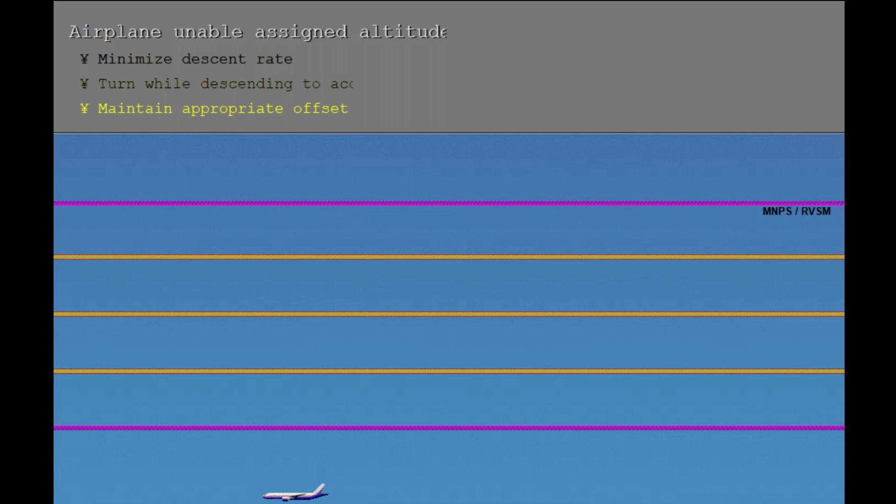In this last example, we'll look at a diversion that takes you across prevailing traffic to your alternate airport. Your initial action should be to first turn in the direction of your alternate and acquire the proper route offset. Next, make a climb or descent to take you away from high traffic altitudes. Finally, proceed to your alternate airport.